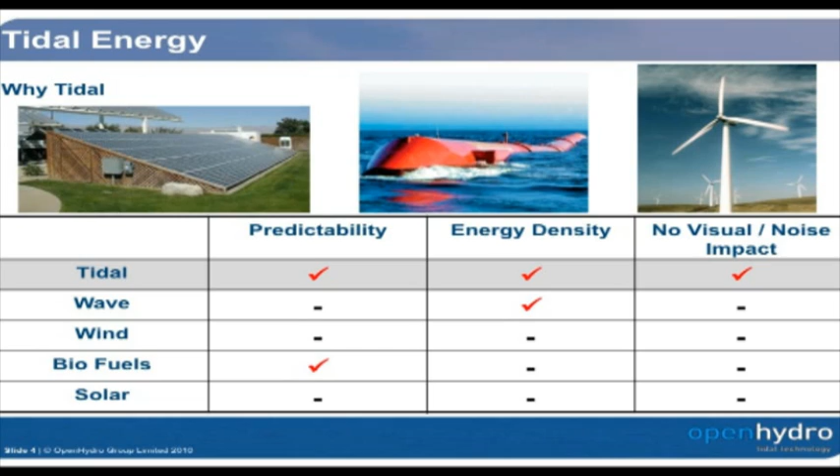And the final part, which is possibly on the softer side but really of crucial importance, is around the acceptance of the technology. We're proposing turbines that sit on the seabed - you can't see them, you can't hear them, and they don't interfere with shipping traffic, as they're deep enough. The result is you get very little barrier to the communities based near these installations, which I think is a very important feature for renewables.

We already have consent for projects in Scotland, in the Channel Islands, in France, and in Canada. We're going through consenting in the US at the moment, and a common theme we're getting is that this is a form of renewable energy which people like - it doesn't have a huge impact on them if they're based near it.

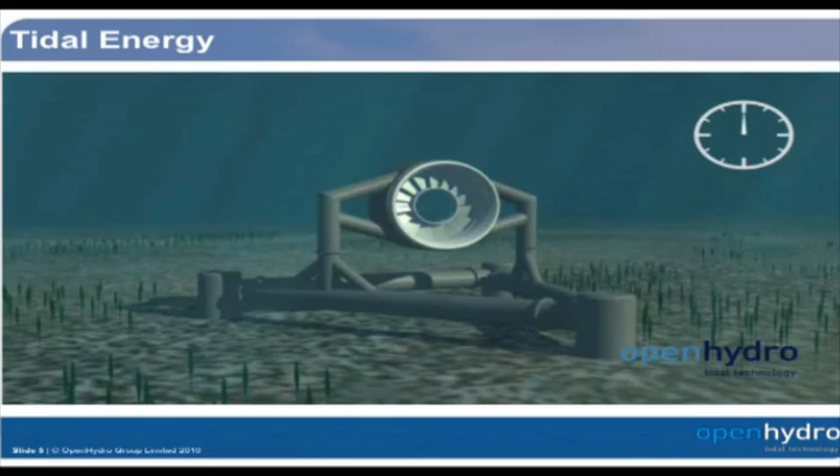So in one slide, in one animation, this really sums up OpenHydro's vision for tidal energy. It's a turbine mounted on the seabed supported by a frame, and for 6.25 hours, like clockwork, the tide flows in one direction. At the end of that period, the tide stops and flows back the other way for 6.25 hours - just like clockwork, a very metronomic cycle. It does that day after day, week after week, year after year. The amplitude, the speed of that cycle, varies around the lunar cycle, which is a 14 or 28-day cycle, but all of that is fully predictable. So we have that form of predictable energy.

I think anybody involved in wind energy would recognise the benefit of this. Typically in a wind site, you'd be looking at 1 to 2 years of met mast data, putting a mast up to record wind speeds for maybe up to a couple of years. We have the huge advantage that we only need 28 days worth of data to characterise a site.

What that means is putting a device on the seabed, a device called an acoustic Doppler current profiler. It's a device that measures water speed acoustically, and we measure the speed and direction of the water up through the water column to a high degree of accuracy over 28 days.

Once we've measured that 28 days and recovered that device from the seabed, we can then use a mathematical technique, a harmonic analysis, to project what that site is going to do into the future.

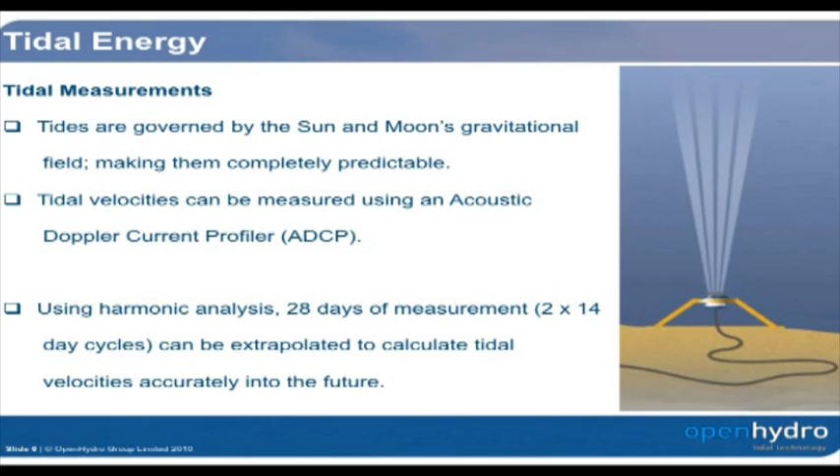Once we've done that, we've got a model that says this is what this site's going to do for the next 10 or 20 years, depending on how long we want to extrapolate that analysis. We can then overlay that with a turbine generation model and say what our turbine would do in that tide, and that gives us the yield from a site.

Whereas with some forms of renewables you're having to make some kind of assumption or best estimate as to what you're going to get in terms of yield from that site, we have that to a very high degree of accuracy, which makes it a more predictable form of investment in terms of developing.

So the next section, I'm going to talk a little bit about the technology we're developing. I'd be conscious that last time we did a trawl of technologies in our sector, there were nearly maybe 50 companies developing technology in the sector we're in. So it's a very active area.

You could take that as a negative if you're in the sector, but actually I take it as a positive. I think if we were the only people in the world doing this, we'd probably ask ourselves a question: why are we the only people doing it?

So the technology we're developing is called the Open Centre Turbine. Probably if there's one message I'd like to leave about our technology, it's around simplicity. We believe that if something's going to survive in a very harsh, very aggressive marine environment, the best outcome is something very simple and very robust.

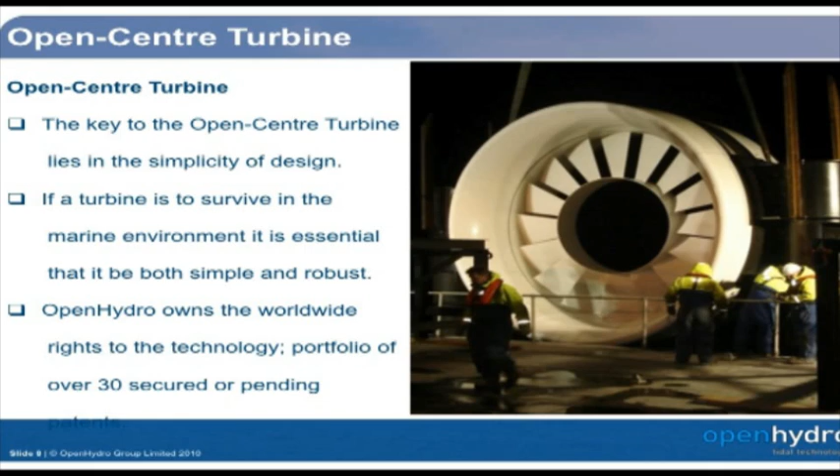As engineers, we could do all sorts of clever things to our turbine, have blades that pitch around, make the whole thing yaw underneath the surface of the water on the seabed. But all of that would result in a higher cost, higher capital expenditure, but more importantly, a higher maintenance requirement. So we need to interact with the machine more often.

Every time you leave the harbour in this environment, it's expensive. Working in the marine environment is expensive. So we've gone down the road of saying keep it very simple, keep it very robust, and minimise that impact.

So how the turbine works - simplicity again is the theme. We have a fixed outer ring and a rotor that spins inside that. As water flows into the turbine, the inner ring rotates, and we use what's known as a permanent magnet generator to extract the electricity. So we're going directly from motion of water directly into power offtake.

You can actually see permanent magnets embedded around the circumference of the rotor, and the generator assembly is within the stator, which makes it very simple. We don't have any conventional drivetrain such as a central shaft which needs bearings and seals, or a gearbox to increase the outtake velocities. So it keeps it very, very simple.

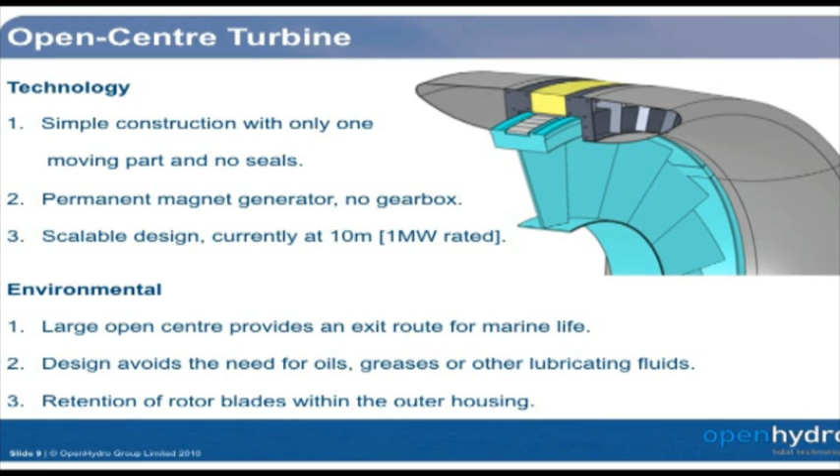We've proven in terms of scalability that the turbine can be built. When we started, we were working with 35 kilowatt units, quite small units. We subsequently scaled that up to a quarter of a megawatt, and most recently we've installed our first 1 megawatt unit. So we're now moving into the territory we see as a commercial scale tidal turbine.

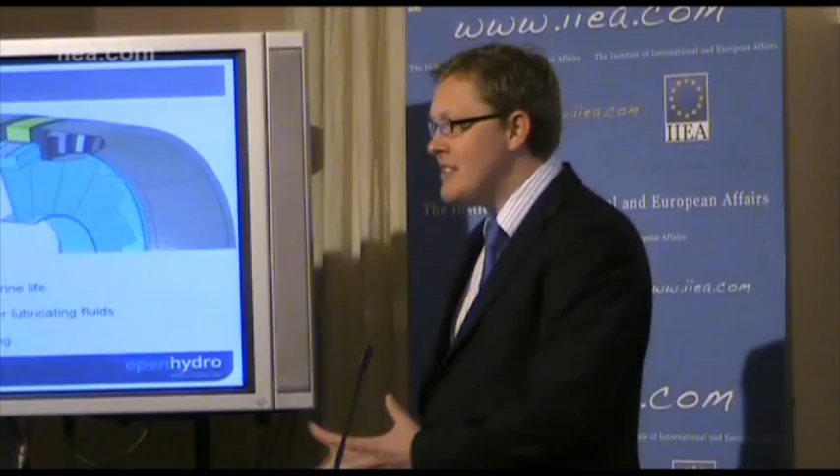As I mentioned in the opening, it's important to have a technology that works, but it's just as important to demonstrate that it doesn't transfer problems from the land, such as oil and gas generation, and then start to create environmental problems in the ocean. It's crucially important that we can prove that doesn't happen.

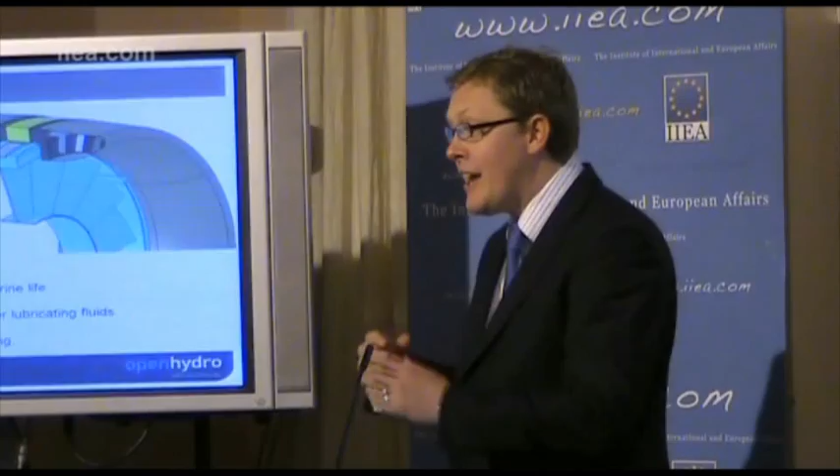So the turbine has a number of design features that support interaction with marine life: a large open centre to allow marine life to pass through the turbine unhurt. That's actually quite similar to a lot of dam technology being developed, particularly in areas such as the US. It's got no oils, greases or lubricants that could cause a pollution risk, and the blades being within the device help make it more visible.

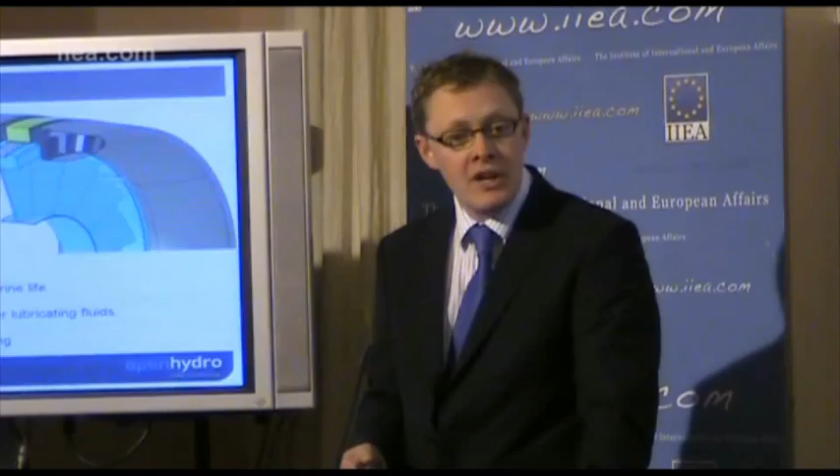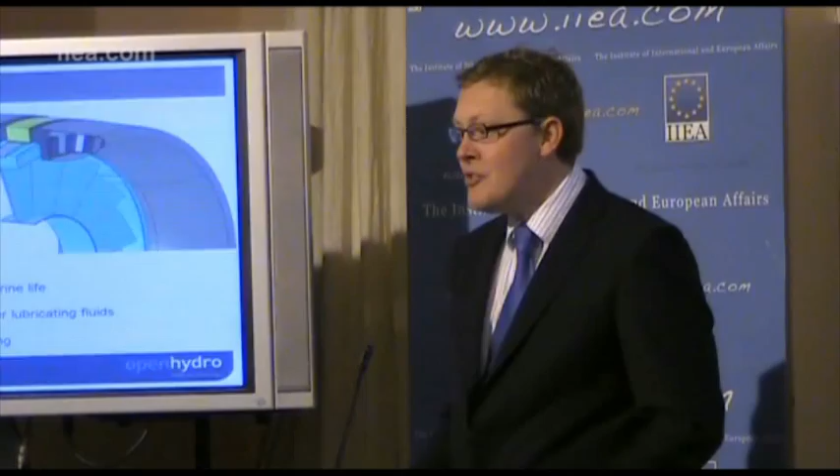The truth of it is, for all those design features, we video underwater all of our testing at our research centre in Orkney. And we've never seen a fish, a seal, a dolphin, a whale, a shark, or any marine life swim through our device or interact with our device. I'm an engineer, so I'm better left to answer those questions to the marine biologists. But what they tell me is that these creatures are far too intelligent to swim into rocks. They don't swim into boats, so why would they swim into a turbine? That's the body of evidence we're building.

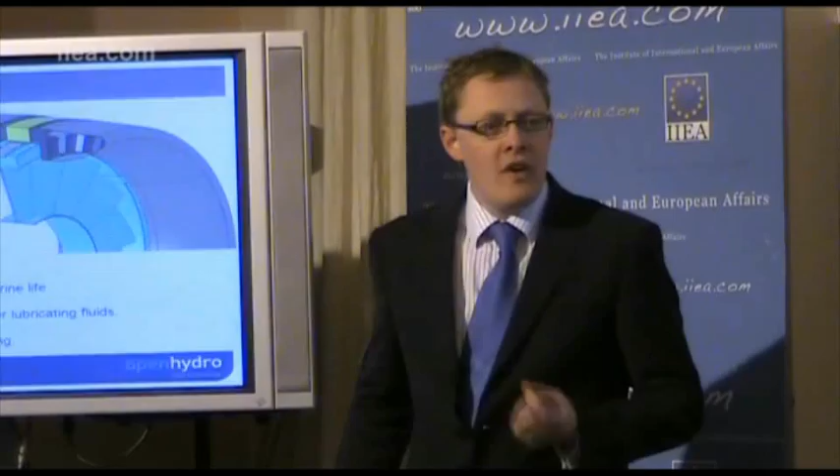There's also the counter-argument that says you're scaring marine life away from their natural habitats, areas where they would feed or migrate through. What we're finding is that isn't the case either. The research centre where we're based is monitored independently by the European Marine Energy Centre, and we're not seeing behavioural changes in the site. We've identified it's got a very low acoustic signature underwater, just enough, in my opinion, to act as a warning for marine life to swim around the device. So we're building up a very strong body of evidence that there aren't problems with this type of technology in the water.

So what have we been doing around testing and developing this technology? We selected the European Marine Energy Centre, EMEC as it's known, as our location to do our R&D. The reason was that EMEC was created by predominantly Scottish government funding, but also UK and EU funding, to develop and promote the wave and tidal industries. Clearly we're focused on the tidal side of that.

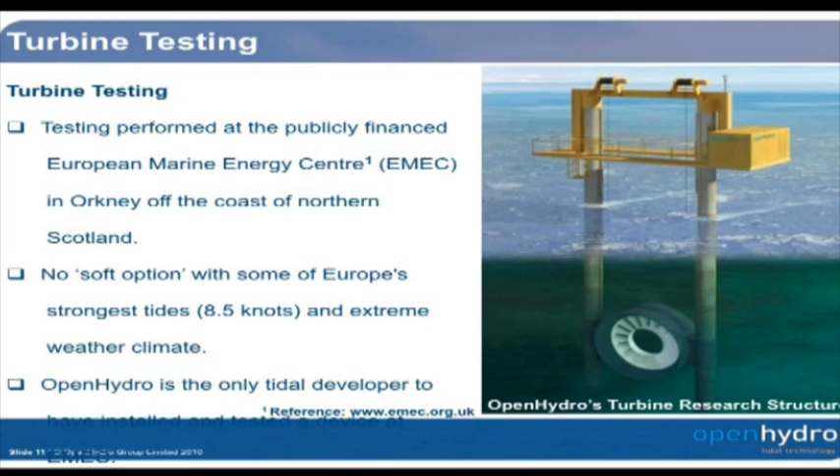They've created a test centre where they've laid cabling on the seabed. They've got a grid connection on the shore, a substation with a grid connection, and also an overriding consent that this is an area where these types of devices will be deployed for research and development work. So it's a bit of an easier step rather than going into a fresh site on our own.

It is no soft option. It has got some of the strongest tides you can find anywhere in the world, up to 8.5, 9 knots, but also the weather climate in the Orkneys is just ferocious. I don't know if anybody's ever spent time off the top of the north coast of Scotland, but it's almost impossible to describe what a gale in Orkney's like. It's just phenomenal. There are no trees in the Orkney Islands, and that's for good reason.

What we decided to construct there is quite unique, very different to how we see turbines installed commercially. I talked about a vision of turbines mounted on the seabed. Well, this structure clearly is a surface-piercing structure, and that's for very good reasons. As Liam mentioned, the early part of my career was in the automotive sector, and if you're designing a new family of engines, you build prototype units, put them into an engine test cell, connect them to a dynamometer, and run them at different temperatures, loads, and fuels to learn about that technology. This is what we wanted in Orkney.

So it's a structure that allows us to raise and lower the turbine using hydraulic winches. That gives our engineers the ability to access the turbine and look at how it's performing. But more importantly, the ability to take one turbine off and replace it with another one. That gives us the ability to iterate. If we'd gone straight for a turbine directly deployed onto the seabed, we wouldn't have had either of those benefits—we wouldn't have been able to interact with it or replace it as we learned about the technology. So very important for us.

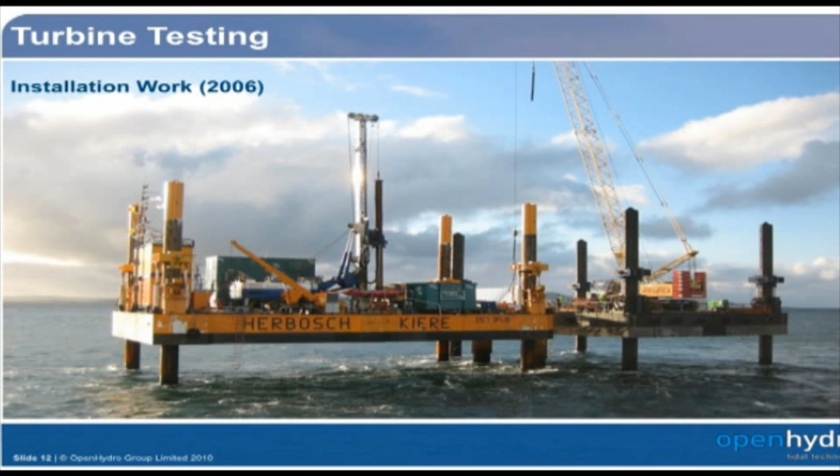In constructing this piled structure, I think it's simple to say it's the hardest thing I've ever been involved in. It's installing two large piles, drilled and grouted into the seabed, which doesn't seem particularly challenging. However, we're doing this in a tidal site off the north coast of Scotland. The equipment we needed were jack-up barges, two of them, one as a lifting platform and one as a drilling platform. And if anybody knows anything about the marine market, they'll recognise this equipment is very rare, very expensive, and also very limited to the water depths it can operate in, due to the length of the legs and how much they can self-elevate. So it creates an awful lot of challenges to construct this way.

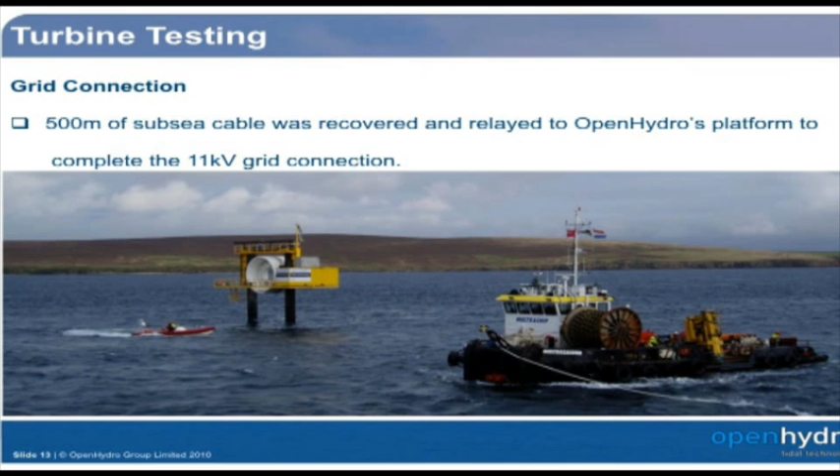However, we completed the construction, and then we also completed the connection of the structure to the 11 kV UK national grid. And that, again, was a very complex operation. We had to move 0.5 kilometre of subsea cable to connect it to the structure and complete an 11kV grid connection. That would be the first time a tidal turbine had been connected to the UK grid.

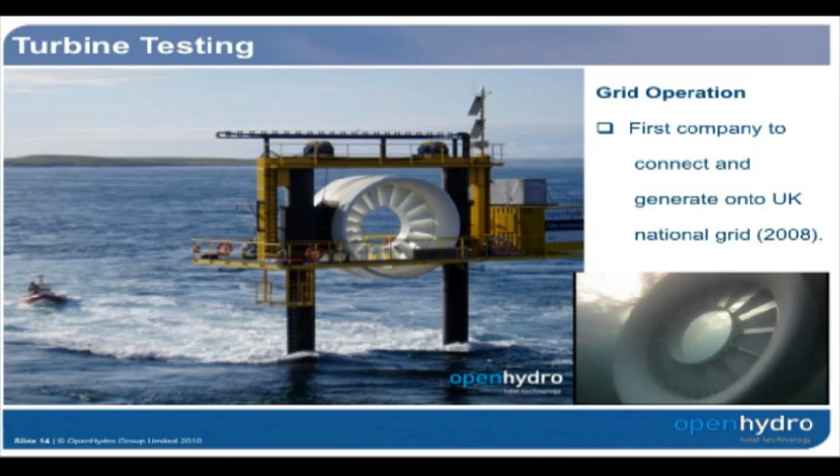As I mentioned, we connected it to the grid. We installed the structure in 2006, and between 2006 and 2008, all the power we generated was dumped into a load bank - that's the structure you can see on top of the control room. From early 2008, we completed the connection to the UK grid and actually exported power into it. We were the first tidal company to achieve that milestone.

Very important milestone for us as a business, but I think also important for this industry as a whole. We're in a potentially very large industry, and it's these sorts of successes that we and other parties in the industry need to be achieving.

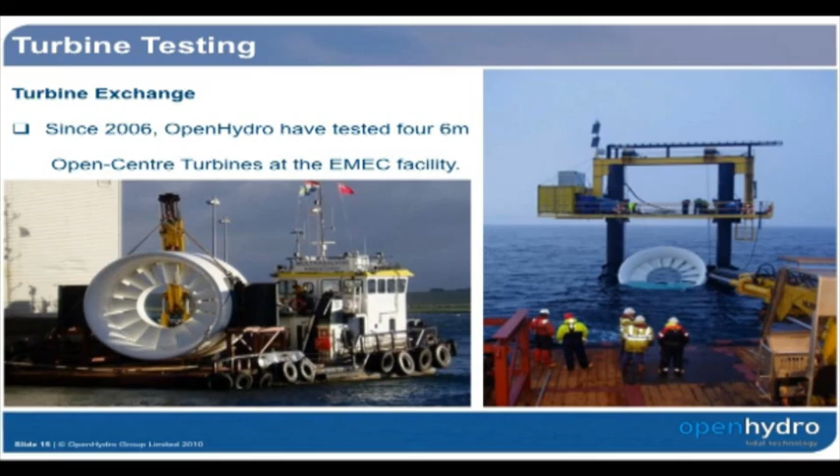Using the structure, we've continued the R&D program that I've talked about. Since 2006, we've tested 4 6-metre tidal turbines on the piled structure. Typically every 9 months we go through a cycle of testing a turbine, learning from it, feeding that learning into the next unit, and then testing that - trying to rapidly iterate the turbine technology to achieve a stage of commercial maturity where we can start supplying it to customers. That's a very important thing to be able to do.

A question often asked of me is, what has changed between the very first turbine and the current turbine we're testing? Really, the main things that have changed with our technology haven't been the turbine concept or design - it's all been about how we manufacture and deliver it.

To give an example, the first turbine we tested in Orkney was a hand-built unit. It took around 9 months to construct. Being hand-built, the repeatability - the ability to build more than one the same - was really non-existent, and you'd argue the quality was low.

If you jump to where we are today, it's a totally different place. We now source our turbine components externally, and our supply chain extends through China, South Africa, North America, the UK, mainland Europe, and a lot of components out of Ireland. We bring those components together and now more assemble our turbine rather than manufacture it. The result is that repeatability is now there, the quality is improved dramatically, and the time to build a turbine has reduced dramatically down to around 8 weeks.

We've still got a long way to go, but we feel we've moved the turbine technology from more of a handcrafted prototype R&D environment to more of a commercial product.

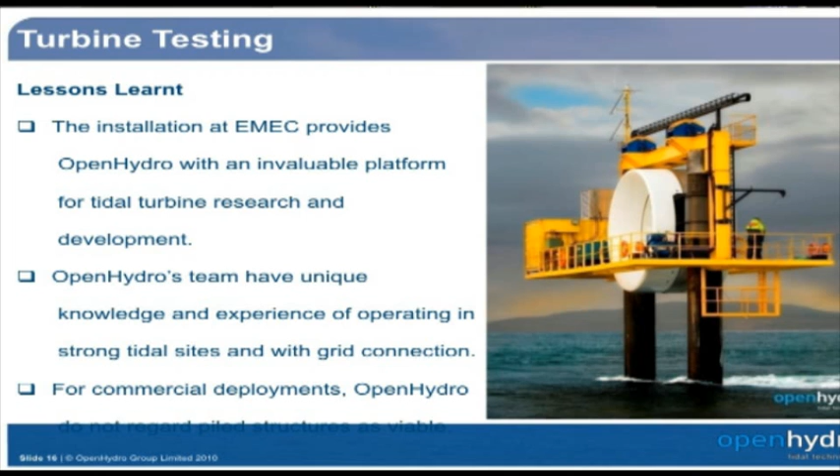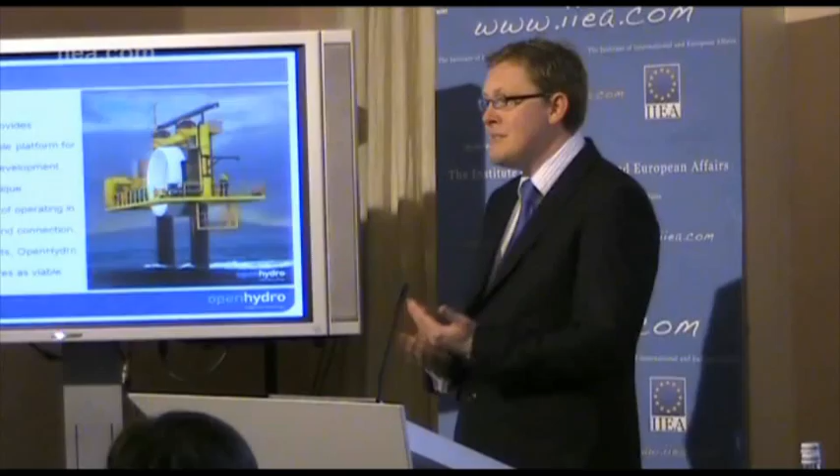It cost us around €250,000 to construct that turbine. The piled structure cost us €6 million to construct. So if you put the simple economics together - if it costs €6 million to install a quarter megawatt unit, we don't have an industry. We knew that from the outset. However, we knew we needed to develop a system to deploy our turbines almost as importantly, if not more importantly, than developing the turbine technology itself.

And that brings us on to the second part of our technology development.

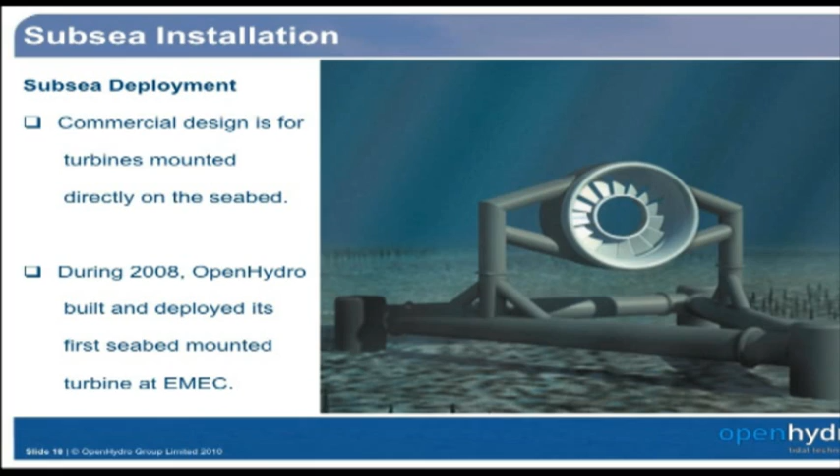So I mentioned that the vision for the company was a turbine mounted on the seabed without visual impact, sitting securely on a steel frame. The concept we came up with was, rather than try to position ourselves on site in a very aggressive marine environment, to do all the work in the harbour, in a nice, safe, secure operating environment. So assemble the turbine, attach it to the frame, fully commission it, and carry the whole unit to site using a specialist deployment barge, and deploy it in a very simple operation.

It took us 3 months to build our piled structure, a very long period of time. Our target for this installation was to complete the same operation within 6 hours. The reason for 6 hours is if we take longer, we have to cope with the tide coming back the other way, and that just adds another layer of complexity onto the whole operation.

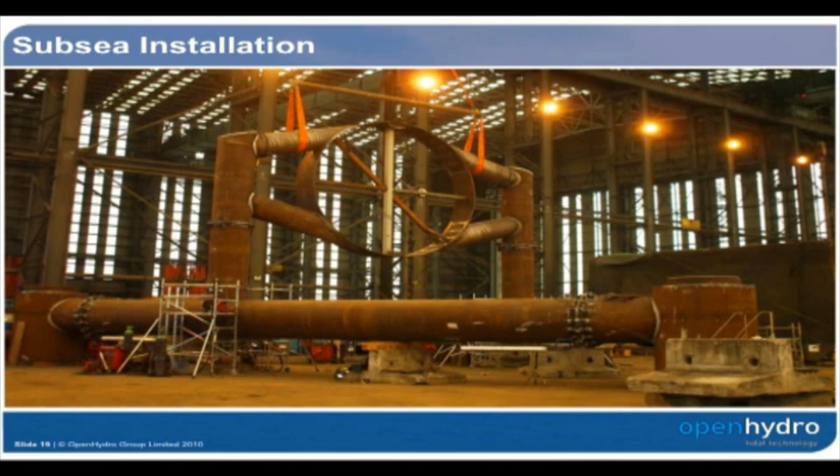So we continued with a program of research and development around the deployment, and this has really been a focus of the last couple of years in terms of our technology development. This is the steel structure that we constructed, built at a shipyard in Scotland, and we were supported very generously by the Scottish executive financially in a lot of this work.

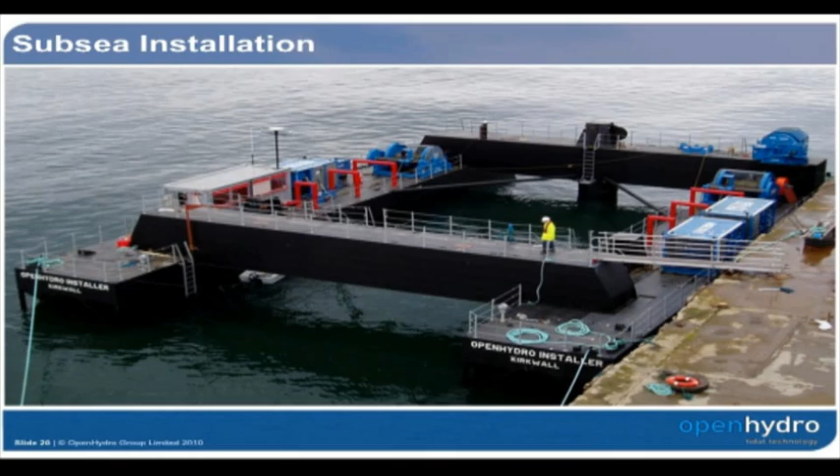We also had to develop the marine equipment to install this structure. This type of marine equipment doesn't exist in the general marine market, so our engineers had to design a catamaran barge, a heavy lift catamaran barge. We then had to go through the process of constructing this, using a shipyard in Holland to build the structure, but also we had to achieve certification. We can't obviously go out into the marine environment without a fully commercial, fully registered vessel.

So we had to go through full certification for use of this product for installing tidal turbines. We worked with a group called Bureau Veritas that had to develop the standards needed to certify this for international use. This barge has not only been used in Scotland, it's also now being used in Canada, where it currently is moored.

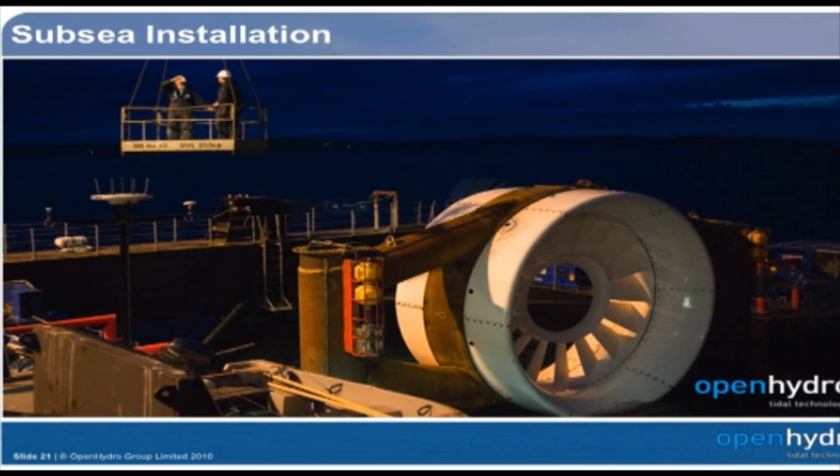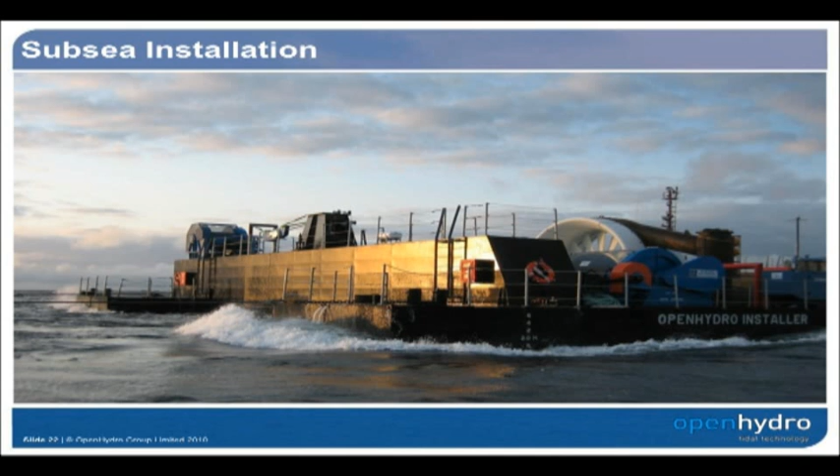The next bit of video is actually just a few minutes before we deployed our very first turbine onto the seabed. What's interesting here is that we're actually stationary over the seabed - the water flowing through there is the tide. Because the tide stops for such a short period, this is the kind of operating environment we have to work with; we have to work when the tide is flowing like that. That means we've had to develop lots of different techniques to achieve that, both successfully, but more importantly, safely.

And this is the final product. This is the frame and turbine actually embedded onto the seabed.

Really, there were two things we were trying to test from this program of work. The first test was, could we actually deploy a turbine onto the seabed safely and accurately? We proved that with our very first installation. The second thing we were trying to prove is, does that structure remain in situ? Does it stay there? Does it fall over? Does it slide along the seabed? We would have carried out an enormous number of calculations and engineering studies to confirm it wouldn't, numerically, but there's no substitute for actually prototyping and testing it.

Well, that structure's now been there for a year and a half. We monitor it very closely, and we've had absolutely no issues with it. It's stayed absolutely exactly where we've deployed it without any issues.

So what does this mean? I think it's quite interesting when you have the piled structure in the background that took us 3 months - we were aiming for a 6-hour deployment with this new approach. The actual time it took us to deploy our turbine, from being on site saying 'right, we're ready to go' to having it released on the seabed, was actually 20 minutes. It was a very, very short deployment window.

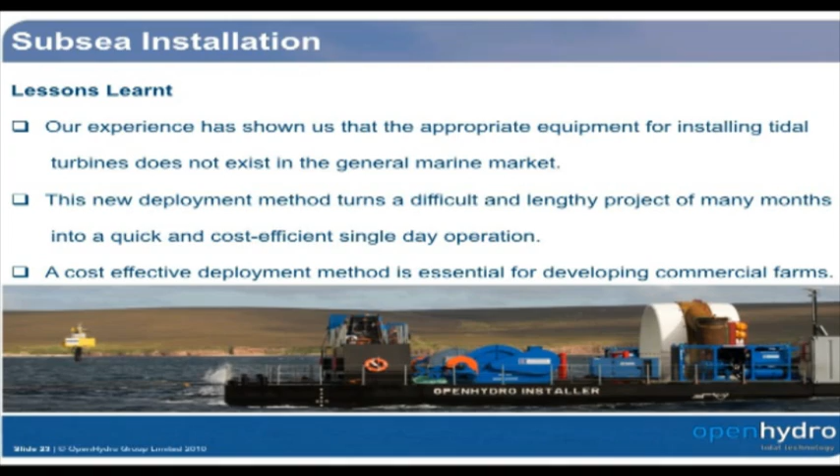In terms of accuracy, we're able to deploy these within a couple of meters of our target location. Bear in mind, this is a 25 meter by 25 meter structure - we're able to deploy it to almost pinpoint accuracy. Crucially also, we're able to align it to a high degree of accuracy. We want to align it with the flow of water, so it's important that we can install it accurately, and we can deploy these turbines to within half a degree of accuracy. So really, the whole program demonstrated that not only could we deploy turbines safely and securely, that the structures would remain in situ, and we could do that very accurately.

This has transformational impact on the economics of tidal turbines, as you'll see later on. To give you a flavour, if we're to deploy a turbine using a piled structure and extrapolate that to a megawatt, installing a megawatt class piled structure would be around 24 million per megawatt. We just recently completed our installation in Nova Scotia of a 1 megawatt unit, and it cost us 3 million. So we've taken a huge amount of cost out of deploying tidal turbines, which has a transformational effect on the economics of tidal energy.

The other thing to comment on is, our vision is not to deploy one or two niche turbines in a few locations. It's about developing tidal farms. If it takes 3 months to deploy each unit at huge cost, it's hard to see you deploying 100 megawatts of tidal turbines. However, if you can deploy one in a day, for argument's sake, you can roll out a lot of tidal turbines quickly. You can have multiple barges operating in tandem in a site, so you can have something very flexible around how quickly you roll out your tidal turbines at a good cost. We think that's essential in terms of developing our industry.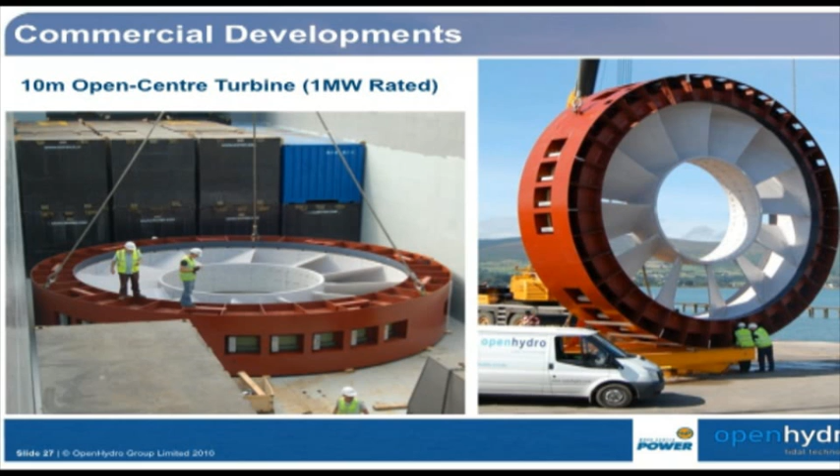So the project was to develop and install a 1 megawatt unit. These are pictures of the turbine that we constructed at our technical centre in Greenore, County Louth, just near here. It's a 10-metre unit, so it's a larger unit, and that's how we get the megawatt rating on it. On the left-hand side is a picture of that turbine in the hold of a ship, just being ready to be shipped to Nova Scotia.

Probably an interesting thing to note is in the background, you see the black containerised shaped units - that's actually our deployment barge. Our deployment barge breaks down into 17 modules that can be shipped anywhere in the world and reassembled within a day. It gives us tremendous flexibility to operate in multiple jurisdictions.

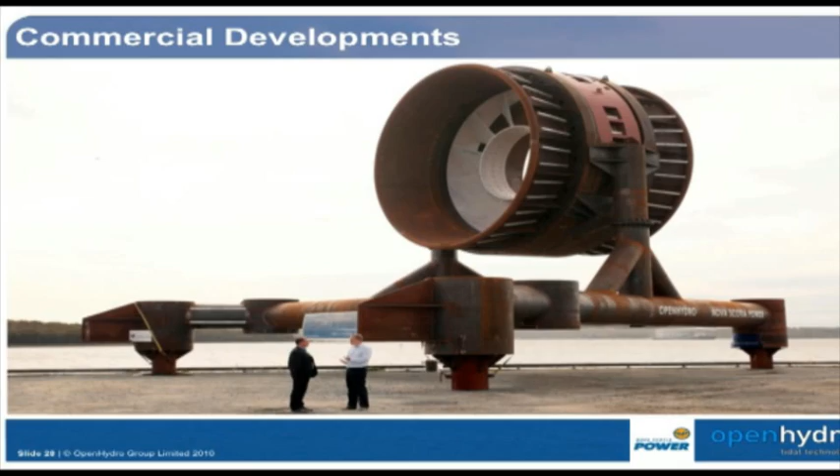This is the turbine fully assembled on the quay side. What we did, which makes obvious sense, is the steel component, the subsea frame - it makes total sense to manufacture that in market. So in this instance, rather than transporting a large amount of steel across the Atlantic, we had a shipyard in Nova Scotia and Halifax construct that for us. That's a model that works well in terms of bringing, with our projects, some local content to the project.

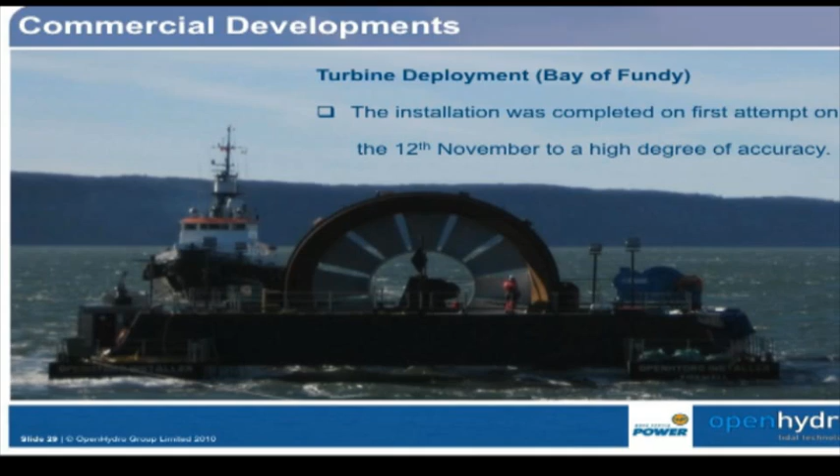And then finally, the day of installation. This was the first time we'd ever deployed a 1 megawatt unit, the first time we'd ever worked in the Bay of Fundy. It was the deepest site, around 50 metres of water depth, that we've worked in. So a lot of firsts with this project. The result, though, was we actually shortened our deployment time. The actual deployment time for this project was 18 minutes from start to finish, and again, to an extremely high degree of accuracy. So we've proven that we can deploy turbines quickly and accurately in tidal sites.

Nova Scotia represents to Openhydro our first revenue feed into the business. Prior to that, all of our money was money out in terms of R&D and development work. Nova Scotia Power was our first revenue feed into the organisation.

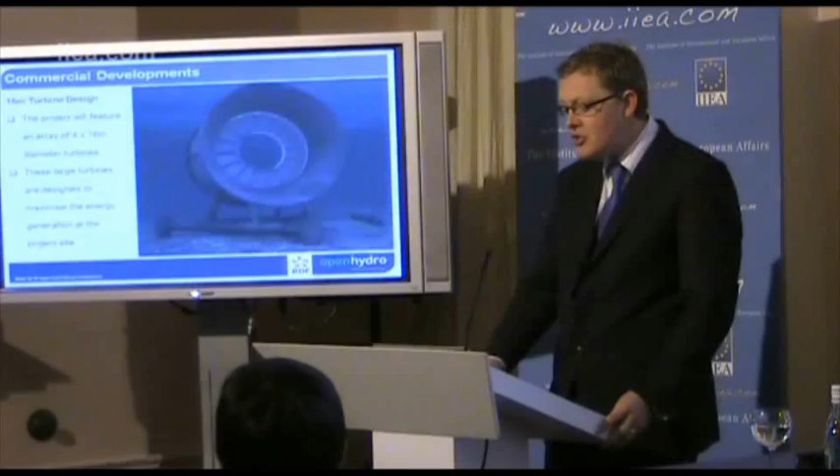The next project we have is with EDF, and a very similar process. EDF would have conducted a fairly detailed due diligence, technical due diligence, and selected Openhydro as their technology partner. The project is to install four 16-metre turbines. So this is a further scaling up of our technology. We've gone from 3 to 6 to 10. Next step for us is 16.

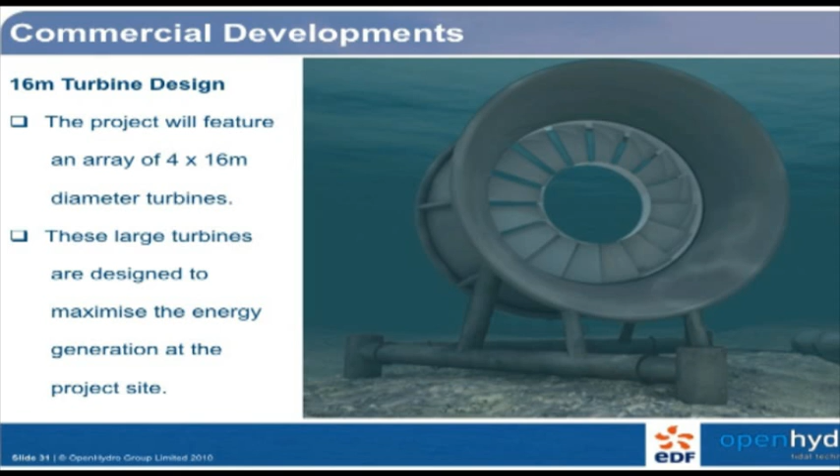And in terms of what that means, the larger the turbine, the more power we can produce, and that also helps the economics. And on the next slide, I have a little bit of video, which hopefully you'll be able to hear okay, just showing EDF's project.

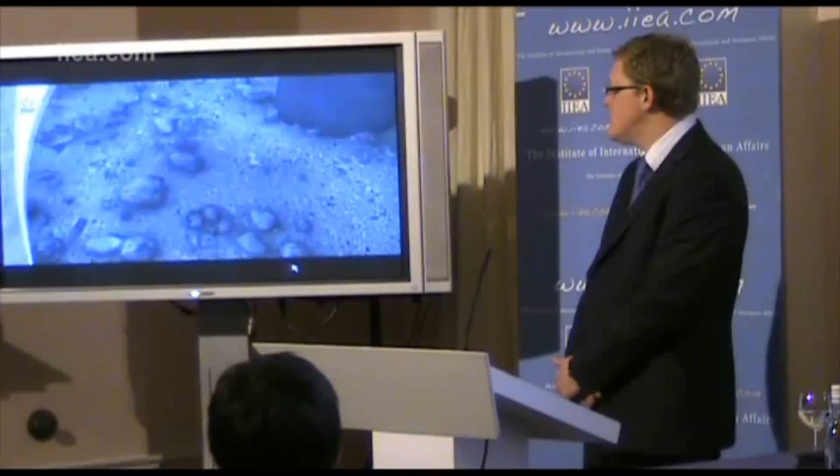Rock, and the geophysical investigations confirmed the absence of sediments. The Paimpol-Bréhat project plans to install 4 turbines developed by the Irish company Openhydro. The turbines have a large open centre, which provides an exit route for marine life. They will be mounted on gravity-based foundations, which will be deployed directly on the seabed, removing any requirement for seabed preparation. Such characteristics mitigate environmental impacts.

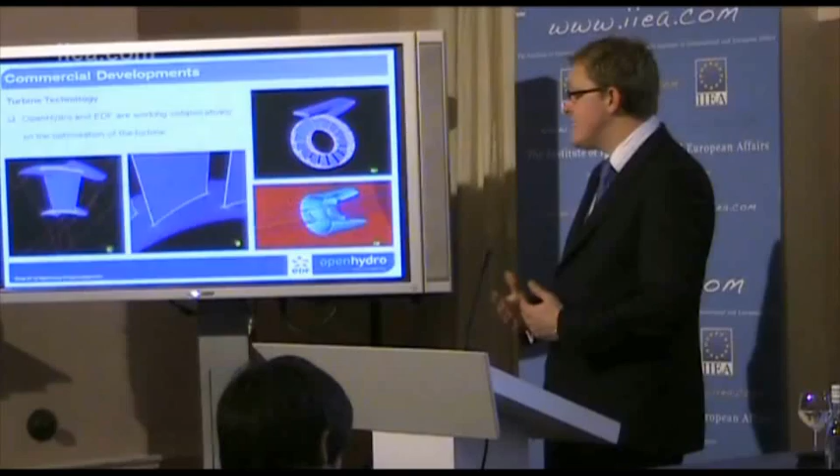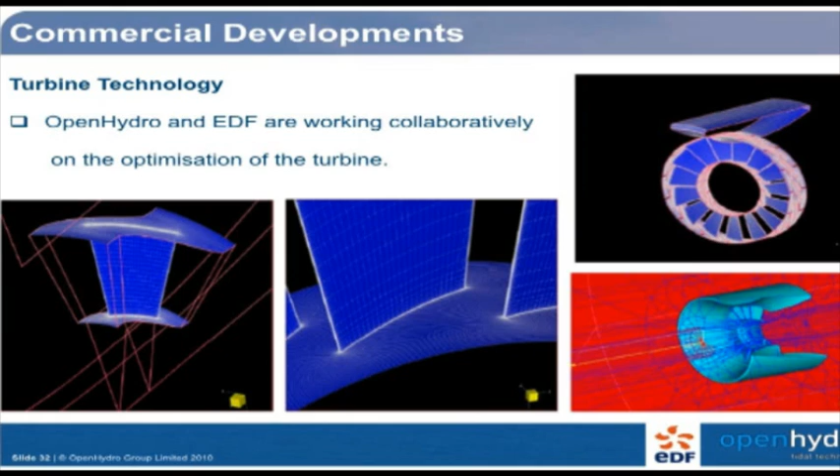Part of the relationship we have with EDF, as well as us supplying EDF with turbine technology and the installation of those turbines, we're also working collaboratively with EDF in terms of optimising our technology. EDF has a large hydro engineering division within their group. I think they have around 110,000 employees in total, and within that they've got a very strong technical focus. So we're working together on some minor optimisation design changes to the turbine technology, which will lead us to an improved yield from the turbine.

However, we're not going to just build our first 16-metre machine and hope we've got our answers right. So what we're currently doing, even as we speak, is testing a 6-metre scale version of the EDF machine at our test centre in Scotland, in the Orkneys. That's allowing us to learn how these design changes will impact the 16-metre machine once it's constructed. And we start constructing the first of these machines later this year.

So moving on a little bit, the first two projects really are around us supplying technology to utilities. The next project is more around being involved in site development.

Typically, the seabed is owned by the state, and in the case of the Channel Islands, there's Jersey, Guernsey, and Alderney, the third largest. A business was created called Alderney Renewable Energy, which together with Openhydro's support has secured a very long lease on the seabed rights to Alderney's waters, which contain an enormous tidal flow, a tidal race. In terms of potential, you could see anything like 3 gigawatts of power come from that one site. It's an enormous amount of energy that could come from that one site.

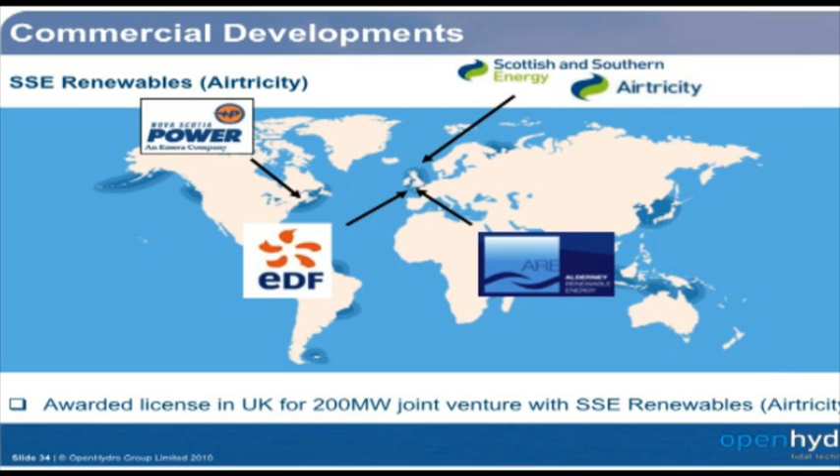So Openhydro and ARE are working towards partnering with parties that can develop that resource and export that power, most logically into the French grid, which is only a matter of a few kilometres away.

The next relationship is also around developing sites which then lead to large-scale turbine arrays. As Liam would have mentioned, this was announced just a couple of weeks ago by Scotland's First Minister, Alex Salmond, that Openhydro had been awarded a 200-megawatt lease on the seabed in an area called the Pentland Firth. You may be familiar that in offshore wind, there have been three rounds of licensing in the UK, leasing seabed rights to parties to develop wind farms offshore. But this is the first round in wave and tidal.

Openhydro partnered with SSE Renewables, Scottish and Southern Energy, in a joint application. And this is a very good model for us. This is bringing the experience and financial strength of a large utility and Openhydro's technology together, applying for a lease to then build a very large tidal farm. This is what we're after in terms of all our projects: looking at developing scale and large-scale tidal farms.

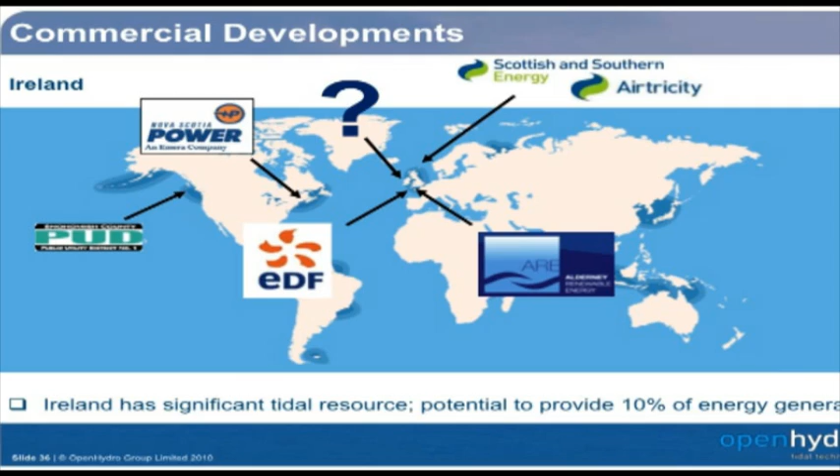Each of these projects really is around scale, as I said. So the question is, what about Ireland? I think it's fair to say that as a business, we've not chosen not to work in Ireland. We've been very much reactive to the approaches that we've received. We've not gone out and marketed our product.

These examples that we've already got demonstrate the partners we feel are the best place to deliver what we're looking at. So we believe that Ireland does have a good tidal resource. We think that some of the assessments completed around Ireland would perhaps be a little bit on the low side. A number of the areas excluded for various reasons, maybe navigational or too deep, would actually be prime for our sort of technology. So we think the resource in Ireland could be upped in terms of potential to maybe around about 10% of Ireland's energy requirement.

What does that mean for Ireland? I think there's really two benefits that could come from the type of work we're doing within Openhydro. First of all, we believe we could be a world leader in tidal technology. There are only two companies in the world with megawatt-class tidal turbines installed, ourselves and a company called Marine Current Turbines. So we believe we've got the potential to create a very much export-driven industry in tidal energy. But the flip side is we can also generate a large amount of energy for Ireland within Irish waters, and we've said that we believe that could be around 10%. So there's two benefits of the type of work we're doing.

In terms of the world map, we've talked about developments we've followed, principally in North America, so the US, Canada, and in France and in the UK. We've focused on those markets because of their maturity in terms of regulation and access to very large Tier 1 resources. However, tidal is a global resource. Just last week, myself and some colleagues were in China for a week, meeting with a state corporation that has access to enormous amounts of energy, enormous amounts of tidal resource. These are the sorts of opportunities that a company like Openhydro has in this very much emerging industry at this time.

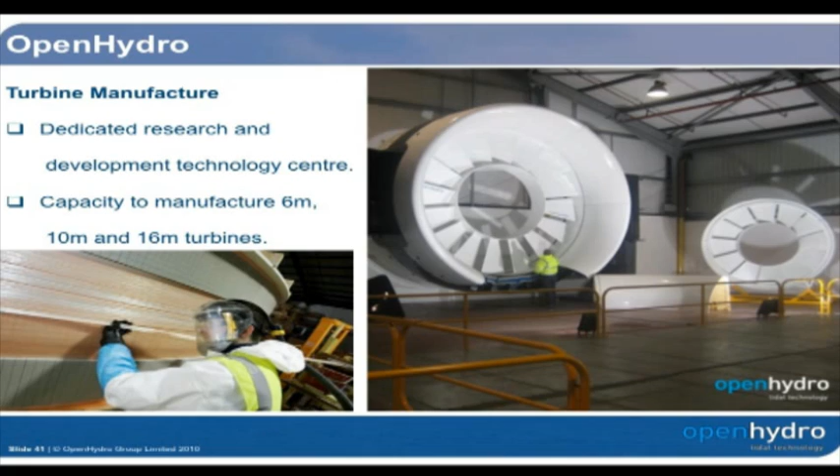A typical model for us, after we've tested a turbine, is to bring it back to our facility in Greenore and strip it down. You can learn a lot by stripping a turbine down and seeing how it performed, and then we finally put that turbine on display. This is a view down the other end of the facility. These large horizontal turntables are the tooling we use to manufacture our turbines, tooling that we've had to develop ourselves. That's how we manufacture the units.

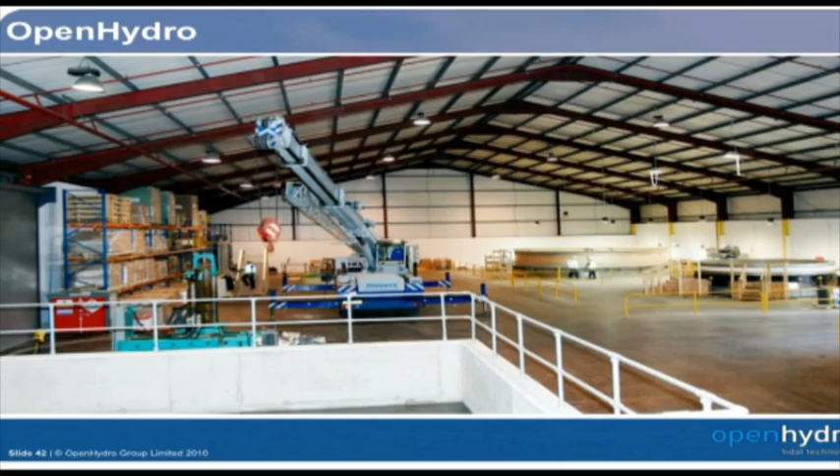In terms of recruiting and developing our team, we're in a new industry. We can't go out and recruit tidal turbine engineers - there aren't any available to us. So what we have to do is try to recruit from companies where we believe the skills can be transferable into a company like Openhydro.

You'll see some very relevant names. For example, recruiting people from companies such as Vestas, E.ON or Rolls-Royce can bring tremendous access to industry knowledge and engineering.

For example, our engineering manager joined us after previously spending 12 years at the McLaren Mercedes Formula One team, where he was head of engine quality for the Mercedes part of McLaren Mercedes. So we're able to recruit very skilled, highly qualified engineers into our group, and that's the key to any business - the people.

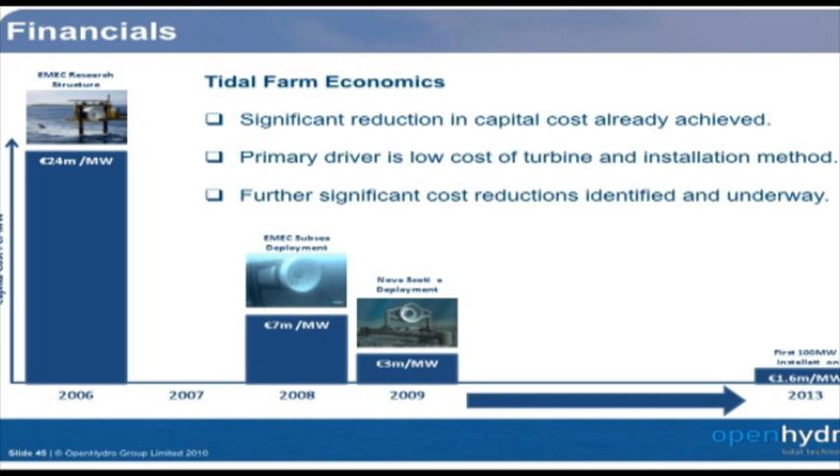So finally, moving on to the financials. As I said at the outset, this is all about delivering a cost of energy that is attractive to our customers. If we start back where we were in 2006, our reference cost per megawatt was around 24 million a megawatt installed, which is enormously expensive. It's very hard to see how you'd make something economic at that level of capital expenditure. Over the last couple of years, predominantly through re-engineering the whole deployment system, but also scaling the technology, we're now at a referenceable 3 million a megawatt.

That's not a projection into the future - that's where we stand today, a referenceable cost from our project in Nova Scotia. Where do we intend to get to? Our target is 1.6 million a megawatt, and we believe that's a wholly achievable target, with very clear plans in place on how to achieve it.

For example, some of our suppliers tell us that at the moment our procurement is one component at a time - a very inefficient way of procuring. Our suppliers say if we could procure slightly more volume, we could see 30 to 50% price reductions as they're able to tool up and gear up for our manufacture. So we see that as a wholly achievable target.

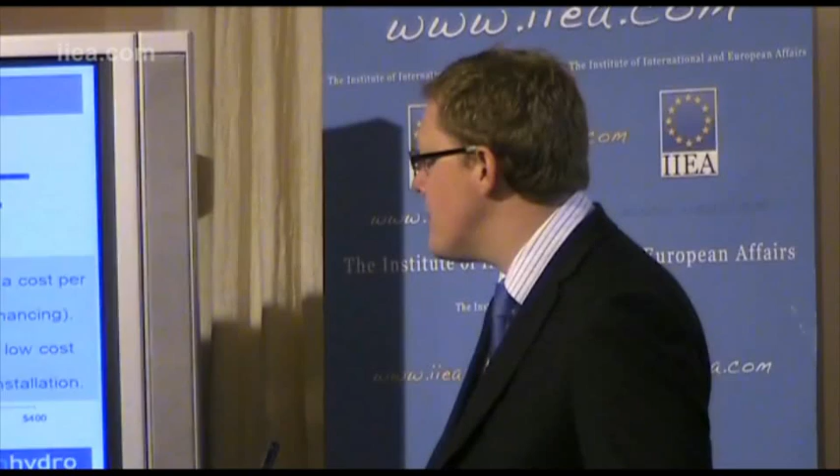What does that translate into, though - the all-important cost of energy, the cost per megawatt hour? I think the perception in the market is that tidal and wave energy are at the very expensive end of the scale, and if we were still looking to deploy turbines on piles, that's exactly where we'd be - probably even that's flattering.

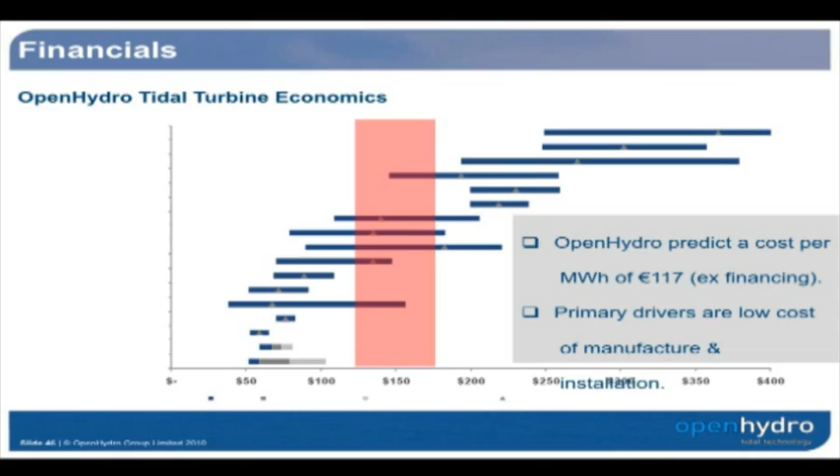By re-engineering the way we deploy our turbines and also scaling our turbines, we've brought our cost to 117 euros a megawatt hour. What does that mean in terms of cost of energy? That's pretty equivalent to offshore wind prices.

Our entry point into the market - this is at building some scale, larger scale, it wouldn't work for one or two turbines, it needs to be at the 50 to 100 megawatt scale - we're looking at around similar prices to offshore wind. However, we see that as our entry point. Like every technology, we believe there are opportunities both through scale and through learning to carry on driving those costs down as we move further towards, I suppose, traditional fossil fuel prices. But our entry point is around 117 euros a megawatt hour.

In terms of our business and how we've achieved what we've achieved - as a business we've raised 52 million euro since 2004 over 4 investment rounds. So we've raised a considerable amount of money, predominantly private equity, either through high net worth investors or through some institutions.

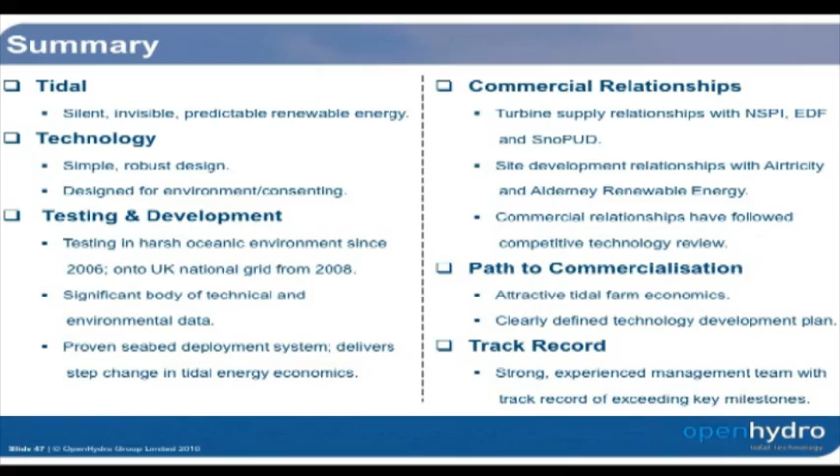For example, Philip Lynch's One51 would hold a shareholding in Openhydro. There's a major Canadian company called Emera that holds a shareholding in Openhydro. So a mixture of both corporate and individual investors. That money has been spent developing this technology and the research work we've done in Scotland.

However, we need to continue to scale our business. We've got what we believe is a global opportunity for Openhydro - an enormous global resource in tidal energy, and we have a very much a leading position within our sector. So we're currently raising further funds, and the principal reason for that is to scale our organisation, giving ourselves the capacity to deliver more of these projects and grow our business.

So that was really what I was hoping to present to you today, and I'd be delighted to take any questions that you have.